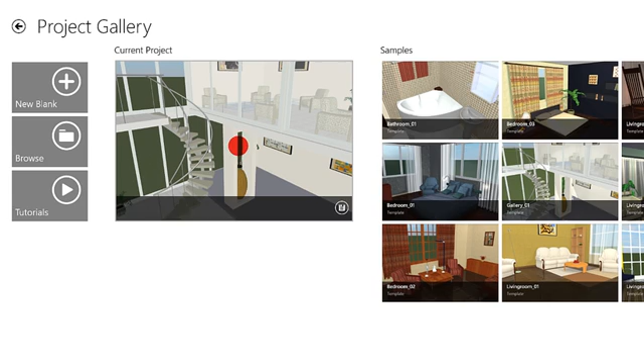Upon launching the app for the first time, we are greeted by the Project Gallery. To the left, we can choose to open a blank document, browse to open a previous project, or view video tutorials on the app. Next, we see the current project, basically the project that was opened the last time we quit the app. Tap that to return to that project. To the right are the sample projects, or templates that come with the program.

Let's go ahead and open these up to get a feel for the way Live Interior 3D works. Welcome to the main window. At the moment, we see the 2D view, which is where we draft out our floor plan and edit our project in 2D. Let's first take a look at the tools specific to the 2D view.

Those are at the top. The first is the Room tool. It lets us draw out rooms much like desktop publishing apps let you draw out text boxes, so you draw a room with 4 walls right away. Next is the Wall tool, which draws individual walls.

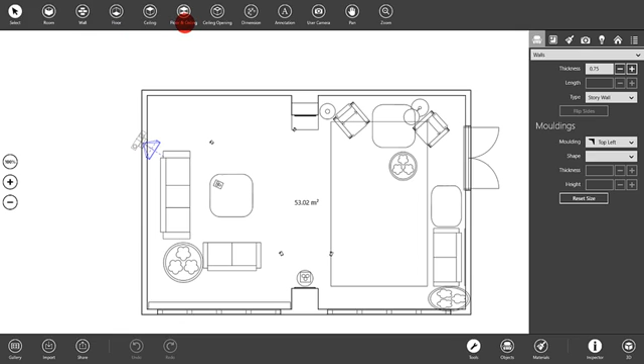The 3 tools that follow can all be summed up into one. The Floor and Ceiling tools create custom floors and ceilings. So let's say you have a floor that is half tile and half carpet. You can use the Floor tool to split that floor into 2 sections. The Ceiling Opening tool works in the same way, but actually creates a hole or opening in the ceiling.

After that, we've got the Dimension tool that measures the distance between any 2 points on your 2D plan. And then, the Annotation tool, which allows you to add custom notes.

Tap the User Camera button to add a camera to your project. You can use cameras to quickly jump from one view to another in 3D, more on that coming up. Lastly, there are the Pan and Zoom tools for easy navigation. So that's basically it for the 2D only toolkit.

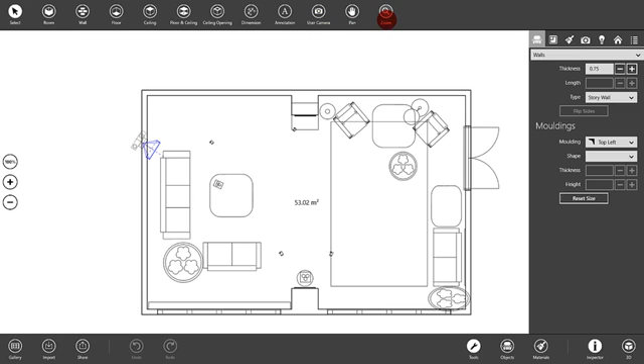Let's switch to the 3D view to see what that has to offer. The first thing you'll notice about the 3D view is that there are movement controls, so we can actually walk around our interior in real time.

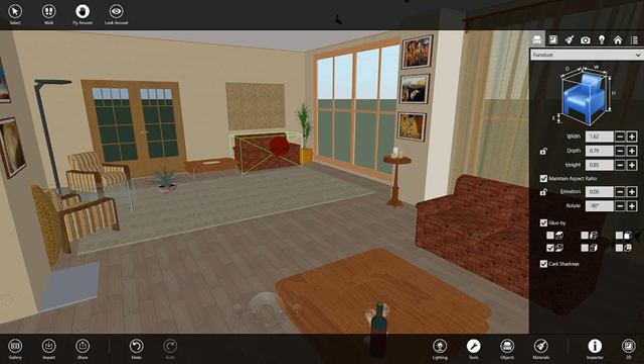Now at the top, we see 3 new tools have appeared in place of the 2D tools: the Walk, Fly Around, and Look Around tools. When we select the Walk tool, we can walk around using the mouse or touch gestures. The Fly Around tool allows us to grab an object and rotate around it to see it from all sides. And the last option lets us look around the interior while standing in one place.

Let's activate the Select tool and check out what we call the Inspector. To the bottom right, there's the Inspector icon. This is where you will make most of the physical changes to your project.

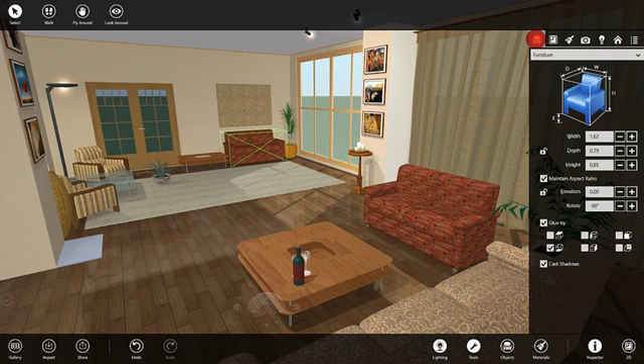The first tab is the Object Properties tab, and this is where we can change the appearance and behavior of objects. Note that there are many different object types, and the options available in this tab depend very much on the type of selected object.

Next is the 2D tab. These are options that allow you to change the way objects and annotations are displayed on your floor plan.

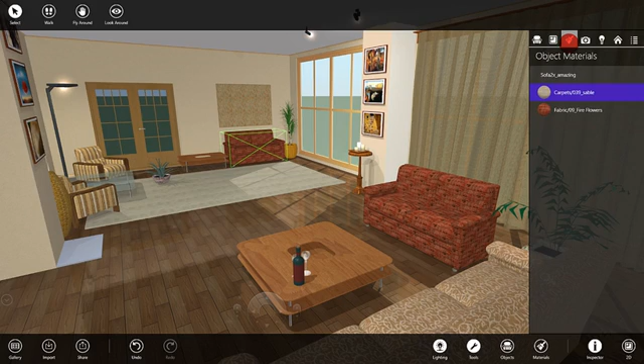After that, we've got the Object Materials. When we tap to select an object, all of the materials that are applied to it are listed right here. We can use this tab to change an object's materials with great precision.

So what about cameras? You can't have 3D without cameras, right? This is a list of the default cameras as well as the cameras that we create ourselves. Tapping one quickly takes you to that camera, changing your point of view in 3D.

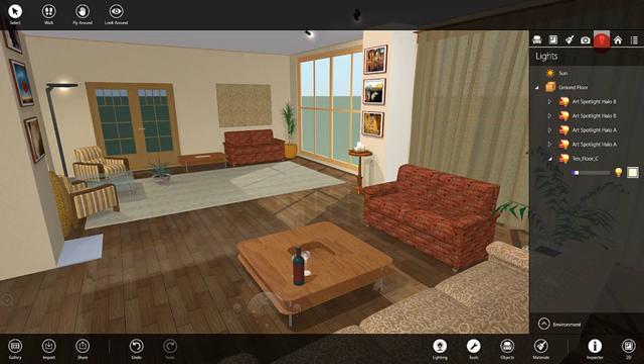Next up is the Lights tab. All of the interior and exterior lighting can be controlled right here. We can easily change the light intensity, turn light sources on or off, and even change the color of the light.

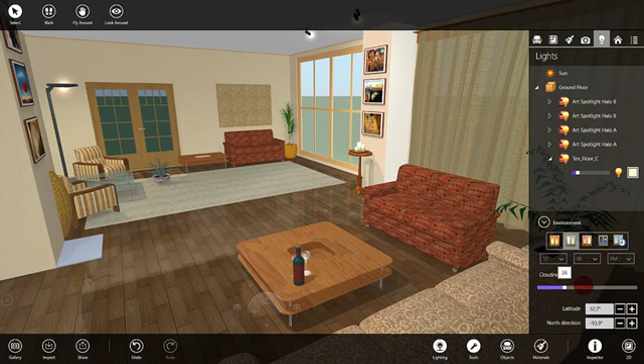Just below, when we tap Environment, a dialog pops up with some options related to the external and natural lighting, including the time of day, how cloudy the sky is, and the geographic location and orientation of our home.

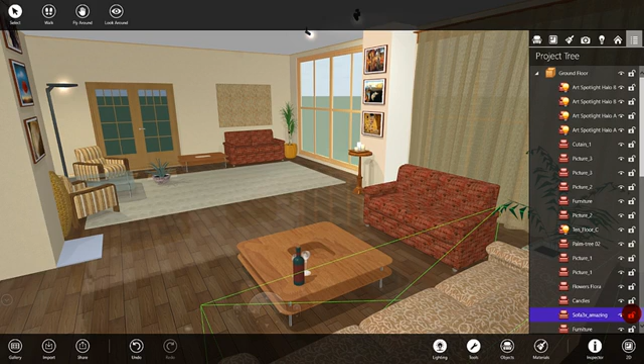To the right of that tab is the Building tab, where stories and roofs are added and deleted. And lastly, we've got the Project Tree, which can be a really helpful tool. Here you can quickly select, lock, and alter the visibility of objects in your project. That pretty much sums up the inspector, so let's go ahead and hide it.

So we've talked a bit about objects and materials, but we haven't seen how we can add those. In the lower toolbar, when we press Materials, we get our Materials palette. And when we press Objects, we see our Object palette. At the top, we can also switch between those using the button to the right.

Now, applying a material is as simple as dragging and dropping it onto an object. And similarly, adding an object is also done with a drag and drop. It's that easy. You'll notice that not all objects and materials live in this palette.

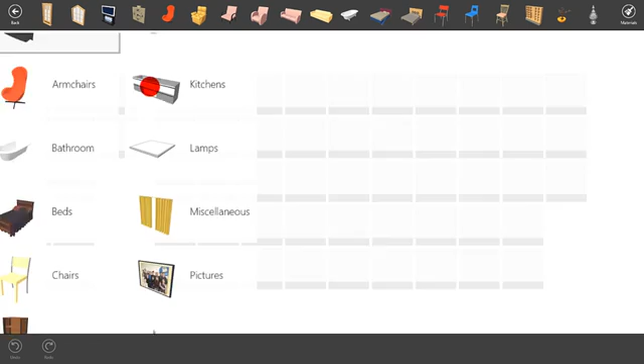The entirety of the collection is in the library. Let's tap the Library button to view it. The first screen we see here displays the various categories that are available. And once we tap on one of those, we see the actual objects. We can then drag and drop an object to the palette to be used in the 2D and 3D views. The same can be done with the materials and the material palette. That's the library in a nutshell.

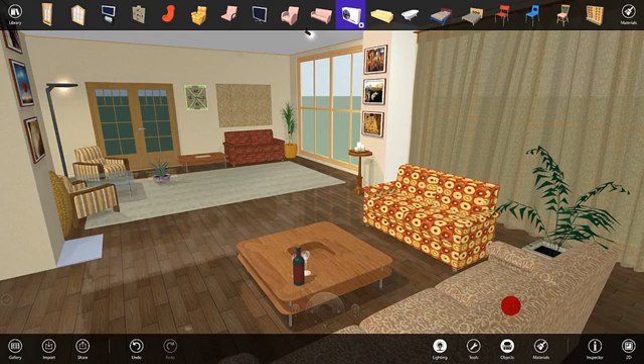Going back down to the toolbar below, the next icon there opens up our 2D or 3D toolkit, depending on which view we have activated. The lighting button toggles lighting on and off. It can be good to turn off lighting when editing to enhance performance in 3D, but always turn it on when sharing views.

Moving to the left, we have our undo and redo functions. Next, we have the option of sharing our view using the Windows sharing features, the ability to import images and objects from outside sources, and a shortcut to get back to the gallery where we started.

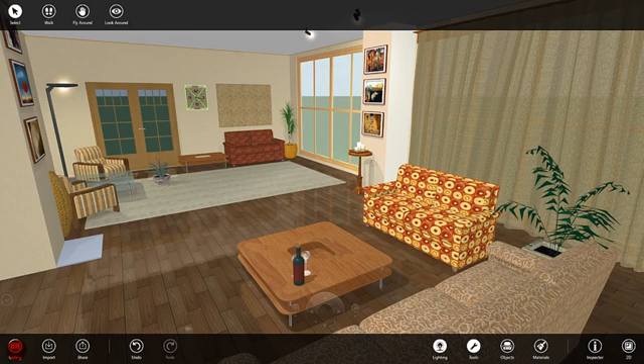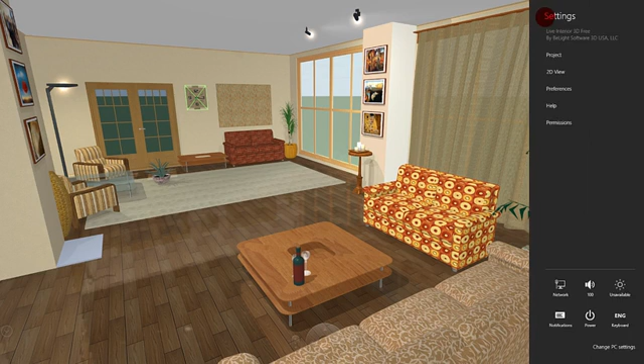That's it for the main interface. But before we wrap up, let's also take a look at the app settings. To do that, let's swipe from the right and tap Settings. Here we can change the project settings such as the scale and measurement units, toggle the way we both view and work in 2D, and set up the app preferences.

Here you can change the 3D render quality, which can help you either get the best picture available or maximize performance when editing. Here you can also switch between the two types of 3D movement controls. Either keep the one in the center, which is best for working with a mouse, or change it to side joysticks, which are better when using a touch tablet.